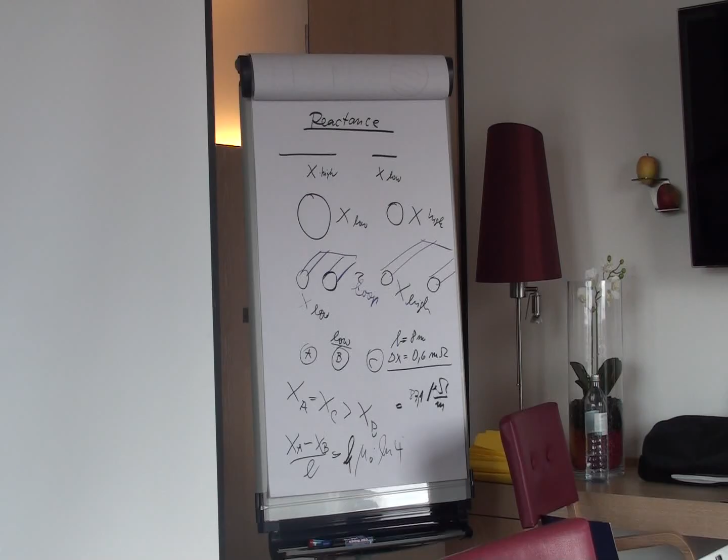Is Epson also Chinese or Japanese? Epson. It's not Korean. Yeah, not Korean. Japanese. Japanese.

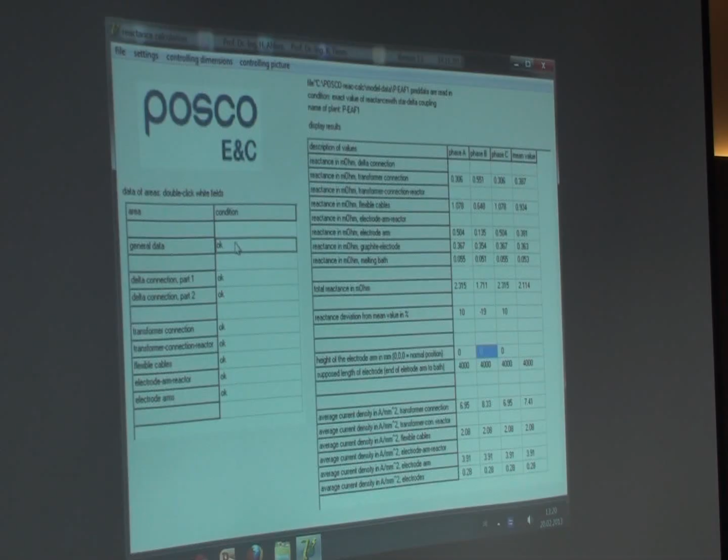This is just really - no, we must do that in general data. Here. Yeah? 1 meter higher. Okay?

We will have a look, and you see the system is suddenly symmetric. Very good symmetry. I trained this before. We have a look into the controlling picture. You see, this is what we call the triangulated system.

See, there's also a picture in it. This was state of the art. You see, in the middle phase, the tubes are in triangle to the outside phases. They are higher. You see that also here. Yeah, this is a possibility. This was state of the art. It came from America.

Electromelt. This picture is from about 1970. You see? In this case, I think there's some problem. The other problems are there.

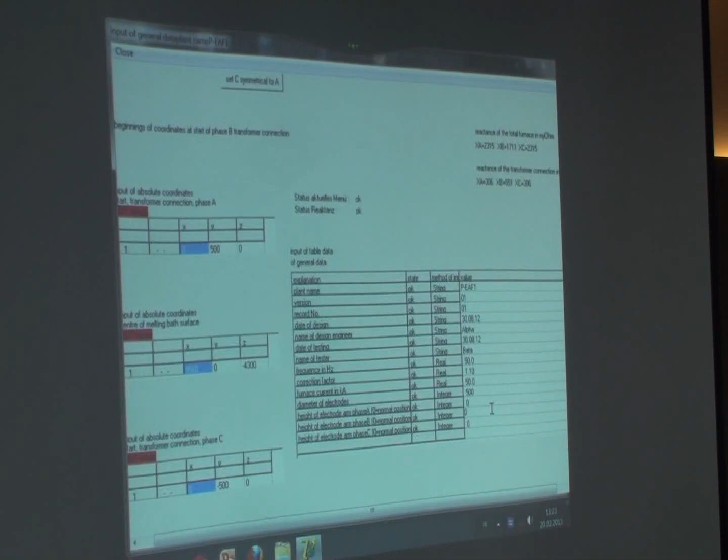I will show you another. Nobody is thinking about this. You have seen on that map that this is a low and this is a higher reactance. If we could give this a smaller diameter,

We can show this, for example, here in the middle phase, to 2, I take 1. You see, in the flexible cable, this is in the middle phase higher than in the outside phases. Yeah, this is this. We can also choose 2, and this is much better than before.

Yeah, this is possible, but I think this does not help. We need also enough capacity for current. This does not help.

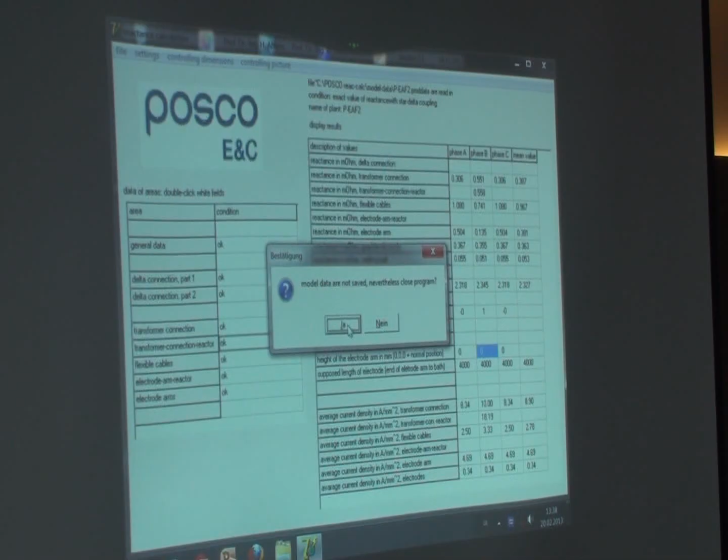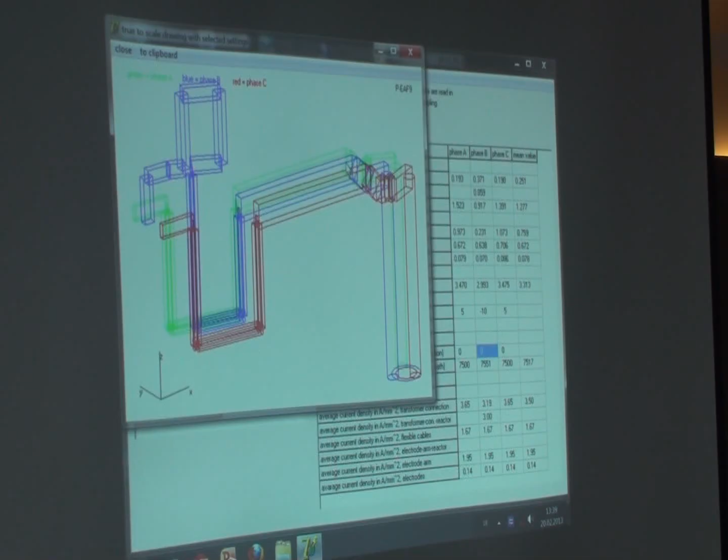This I have made new, and this looks so, you see that? We have a look from the top, you see that? And we may have a look from the side, this is.

You will ask me, why do they make this? You know the reason? I do not know, but I think if the clamp—if the electrode is small, the length is small, maybe here's the roof. About here's the roof of the furnace, and they do that because this part of the electrode holder should get a higher distance from the roof, from the hot roof. I think this is more.

The reason would be to hold these things, get more distance from the roof. This may be the reason. I do not know the other reason. The other reason may be—

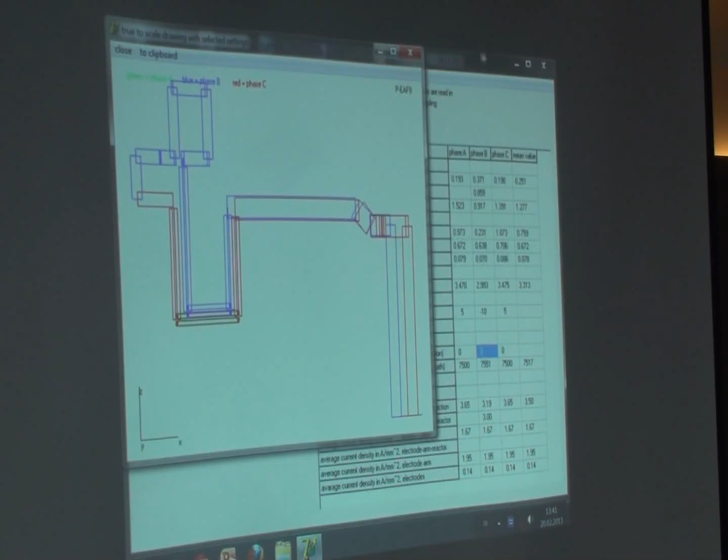Yes, you can see here, here's the roof, and they want to have this. Maybe they do not have enough space, therefore they must do that because here's the end, and therefore they can get with this part to the top of the roof. This may be the reason. Okay, and there is another possibility to make the same reactance on the electrode arm.

On the electrode arm, many of the constructions look like this. Yeah? This is a construction of the electrode arm.

You see here again the connection of the cables. They are connected to the start of the reactor. And here between is isolation, because on this part the reactor is connected to the holder. The current is flowing in this direction.

So, yeah, this has a big advantage because you do not need to weld here. You can fix it with a fixed port. Yeah, okay. This is a typical connection. You see, there's a small distance to the cable of the middle phase.

And many of them are built this way. But this is 1.2 meter and this is 1.4 meter. This is the highest value I would choose. These are the possibilities to connect this at the end of the electrode holder.

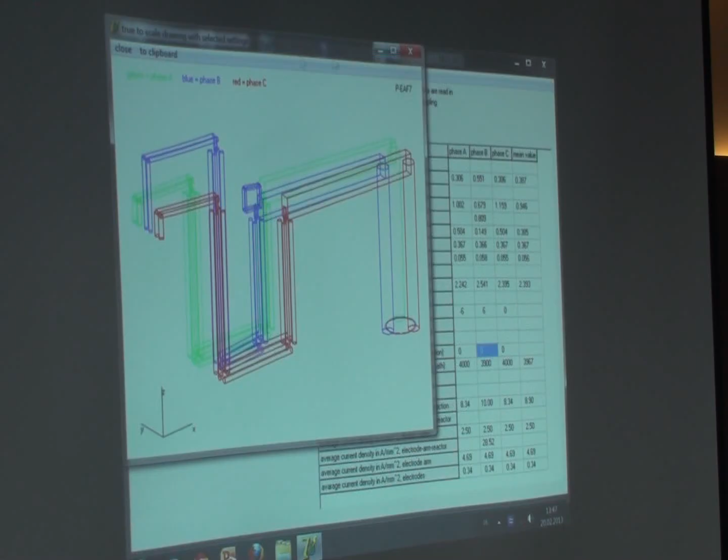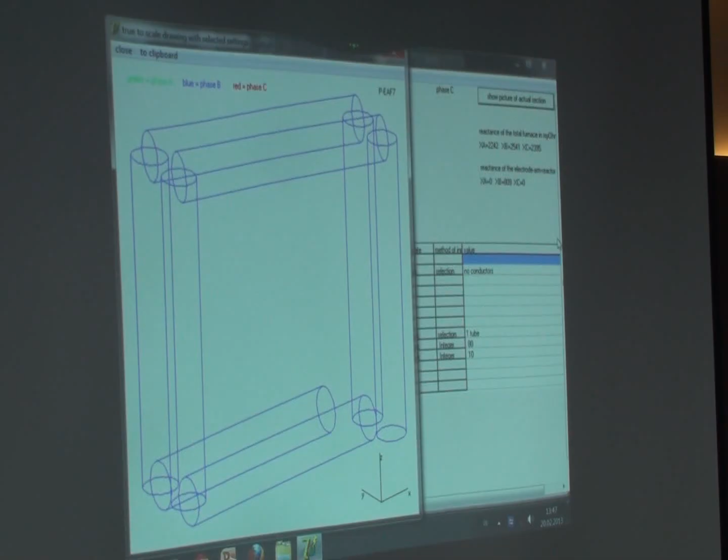You see that in the 3-dimensional view? Yeah, 2 windings. And we see that this looks... we start here - 2, 3, 4, 5, 6, 7, 8.

You see that? One tube of 80 millimeters. The reactor is 0.8 milliohm, and they are only maximum 500 millimeters long - half. The material is the same.

You know, many furnaces have an additional reactor on the primary side of the furnace transformer, if there's not enough electrical stability. Many furnaces have this also, like the Hamburg steel plant - there's an additional reactor which is built in the transformer box.

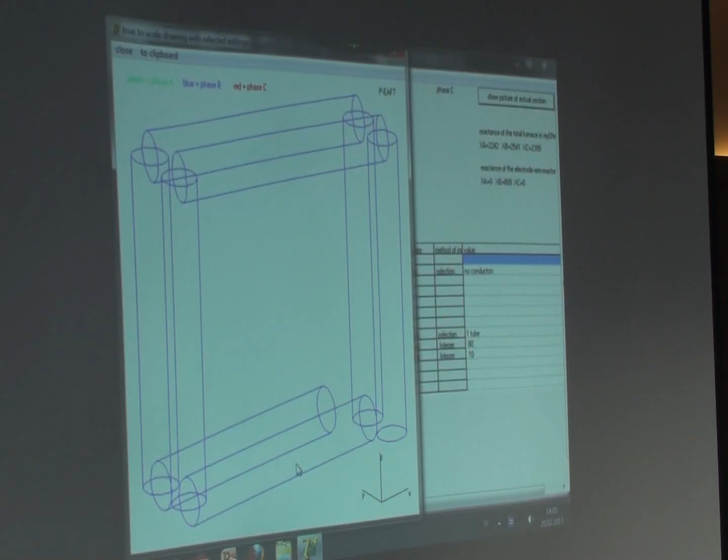I made this, but nobody has made a realization of this. But you can do that if you have a furnace which needs an additional reactor every time. You can use this construction. You can change the parallel reactor addition. You can do that. I think there's no danger in this. You must keep these parts together. You must make a hole here.

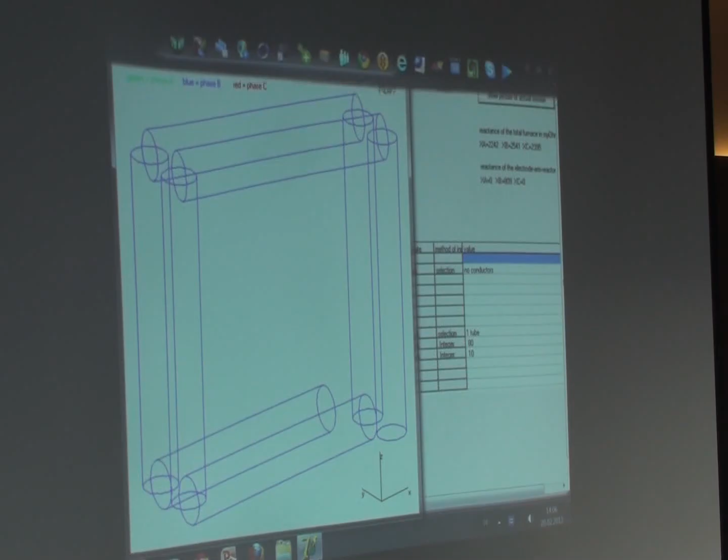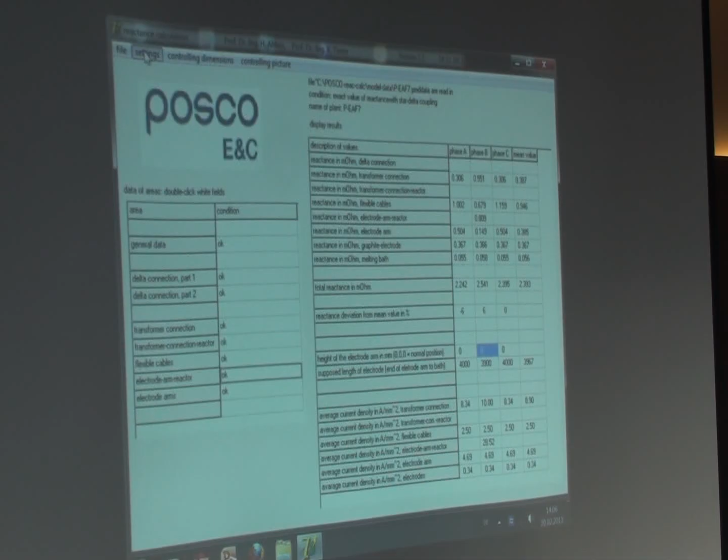You see that here? The only place you must make an isolation is in this part. This point must be isolated from the electrode holder because the current is flowing in this direction. And you can calculate how much is the voltage on this reactor. The voltage may be 60 kiloampere multiplied with 0.6 milliohm. It's 36 volts. The voltage is very small, so you should not be afraid that you get arcing here.

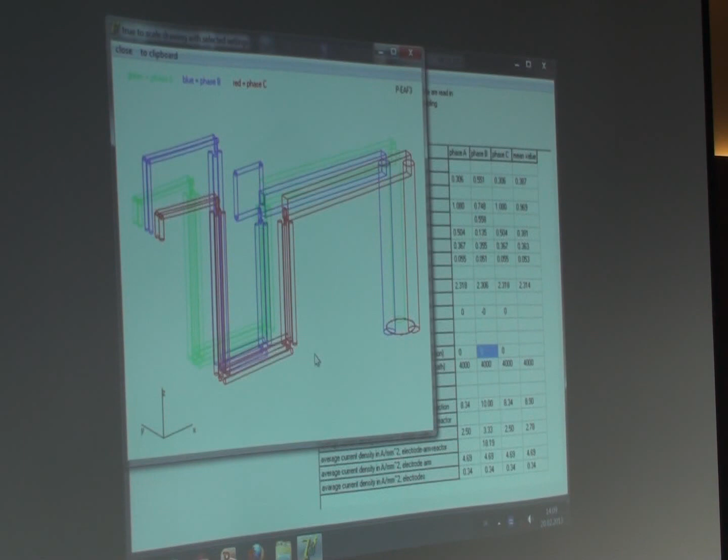The two windings reactor can have advantages. You are thinking about this. The other case. About this question, or are you tired? Shall we make a stop? Okay, the two windings reactor. That's my idea.

Thank you. If you are making this, you can send me a picture and a postcard. Okay?

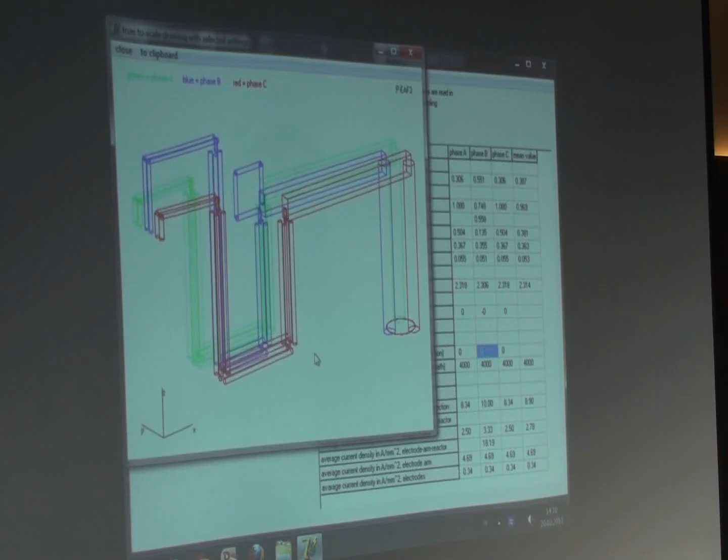This is my point number C. Now, we have about 1 hour. Let's make a little stop.